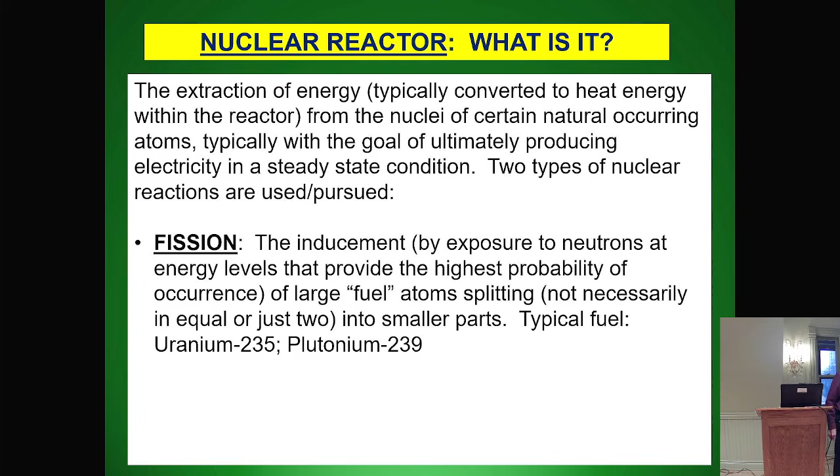This ends up being produced in every practical operating fission reactor in the country. Okay? Just realize that. I know a lot of people might think, oh, plutonium being produced, bombs, all that. It gets produced. In fact, in any fission reactor in the United States that we're going to talk about, roughly by the end of a given fuel cycle, which is typically 18 months, about 30 to 40% of the power being produced is coming from that fuel that is produced inside the reactor itself.

The other type of nuclear reaction that we're not currently able to make electricity with, but we're trying to investigate, is fusion. What is that? Well, that's pushing subatomic, like the nucleus of a type of hydrogen called deuterium and or tritium. And that just has to do with, does it have in the nucleus a proton and a neutron, that would be deuterium, or a proton and two neutrons, that would be tritium, okay? Pushing those together and getting energy out of that.

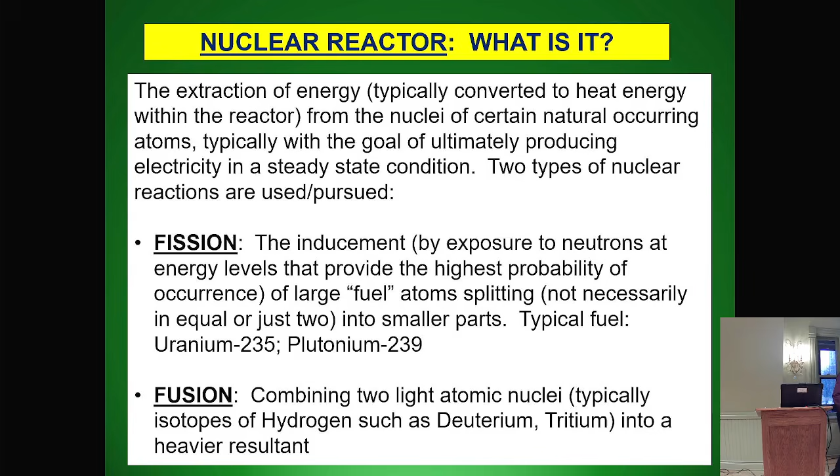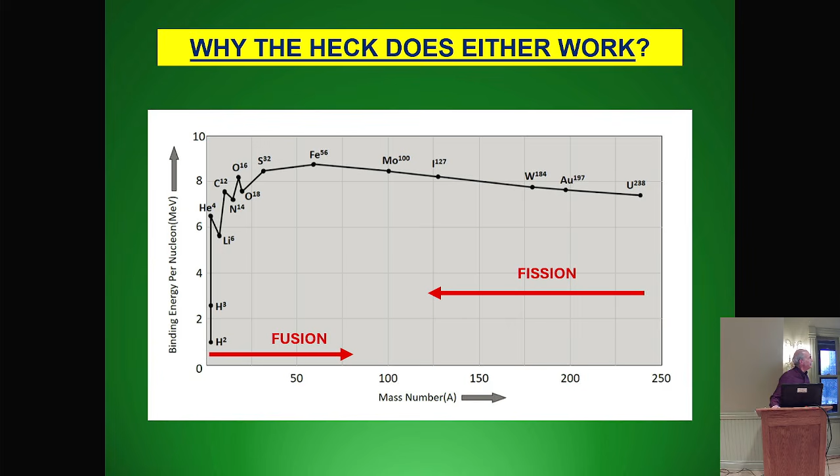And of course, it begs the question, how is it that both splitting nuclei can give me energy and combining nuclei in a sense can give me energy? That's what the next thing is designed to answer. And this is a plot of what is called the binding energy per nucleon curve. So of course your first question is, what the heck's a nucleon, right? A nucleon, as the name might imply, is a particle that resides in the nucleus, either a proton or a neutron, okay?

Binding energy is the amount of energy, think of it this way, we can look at it from two different vantage points. One is, I have a nucleus. How much energy would it take me to pull every one of those neutrons and protons out of the nucleus and separate it into all of its constituent parts? That's binding energy. Or the opposite. When I combine all of those same particles into a nucleus, energy is liberated. And that same amount of energy is what I had to expend to do the first part, where I said I would pull it all apart.

That's called binding energy. What is binding energy per nucleon? It's after we figure out what that total binding energy is that's liberated when I put a nucleus all together, or how much I have to expend to pull it all apart. You just take that total divided by the total number of nucleons, and that's the binding energy per nucleon. It's an average. What do we have here? This is the mass number of naturally occurring stable nuclei and or atoms. This is binding energy per nucleon, what we just talked about.

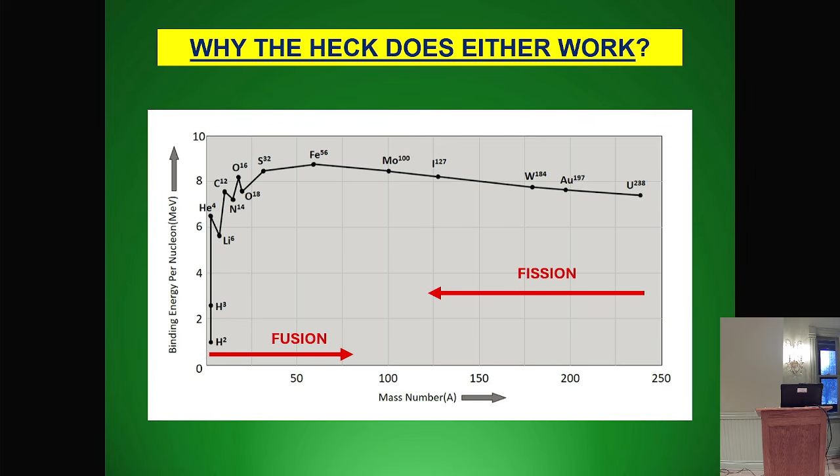What this shows you is that depending on where I start, in fusion, if I start with very light nuclei like deuterium and tritium, and I put them together to get a heavier nucleus, I end up with something that's more tightly bound, a higher binding energy per nucleon, which means that when I put those things together, they liberate energy out.

And similarly, when I start with a heavy nucleus like uranium, way out here, when I break it into smaller components, I get something with, again, a higher binding energy per nucleon. From this end of the curve, I get a higher binding energy per nucleon out. I get energy liberated. When I start with light nuclei and combine them together, I get a similar type of thing. Now, obviously, you can see that I get a much larger change with fusion over here on a per reaction event than I do with fission.

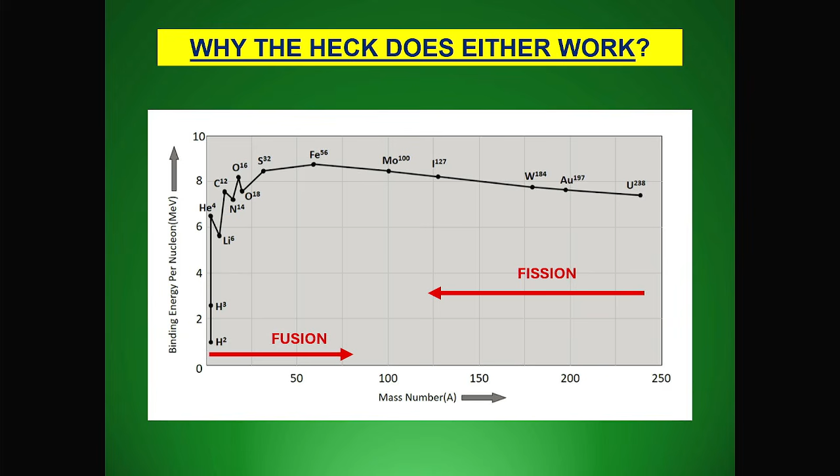So you can get nuclear energy out of a reaction going either direction. It depends on what you're starting with. And of course, you might be wondering, what's the most stable thing according to this, or the highest binding energy per nucleon? Iron. Iron's right there at the peak. Questions on that?

Okay. That's getting too detailed. That's for another day.

Now, of course, the investigation into this was accelerated during World War II in the efforts to develop the atomic bomb, starting with Chicago Pile 1, which was a demonstration reactor in the city of Chicago, not at Argonne National Lab, but the University of Chicago. The purpose of that was to demonstrate the theory behind a chain reaction.

In other words, that a small amount of neutrons that we start with would induce a certain number of fissions. Each one of those fissions would give us more neutrons, somewhere between 2 and 3 neutrons per fission, essentially more than doubling what we started with, and create more and more reactions. That was the purpose of this. And it was comprised of a bunch of graphite blocks with holes drilled in them for fuel, used natural uranium. So it was not enriched.

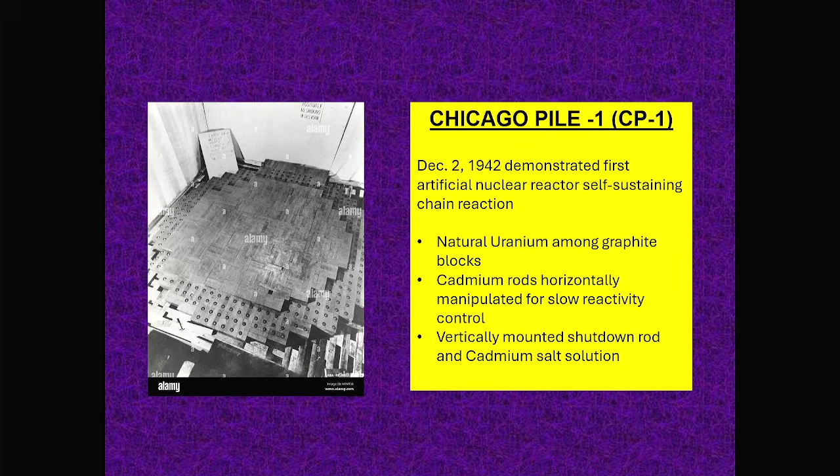And they had some emergency methods. One was a vertically mounted shutdown rod with basically an axeman and a pulley. And someone with a bucket of cadmium salt solution on a platform up above that they could dump onto the reactor. Some pretty, in today's perspective, crude devices.

That was called the Metallurgical Lab there at Chicago, led by Arthur Compton. You may have heard of that name. He was a Nobel laureate. And again, it was to prove that the chain reaction would actually work. Once they did that, they determined that they would need more uranium and plutonium production for developing the bombs, and that resulted in a reactor out in Hanford, Washington, being built for that effort.

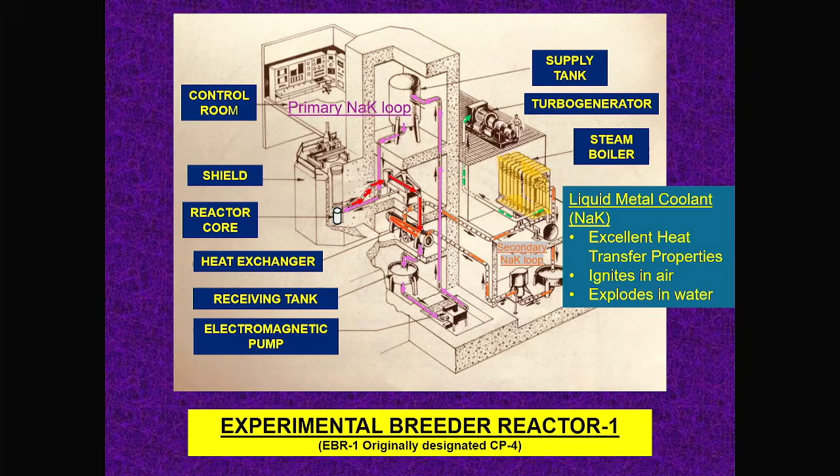And then the green is that steam being routed up to a turbine. The steam pushes the turbine blades around. On the other end of the shaft of the turbine is a generator, and that's where the electricity is produced. Think of it as a magnetic field spinning around, cutting through stationary metal coils, which induces voltage and current that we can then hook up to the wires out on the grid.

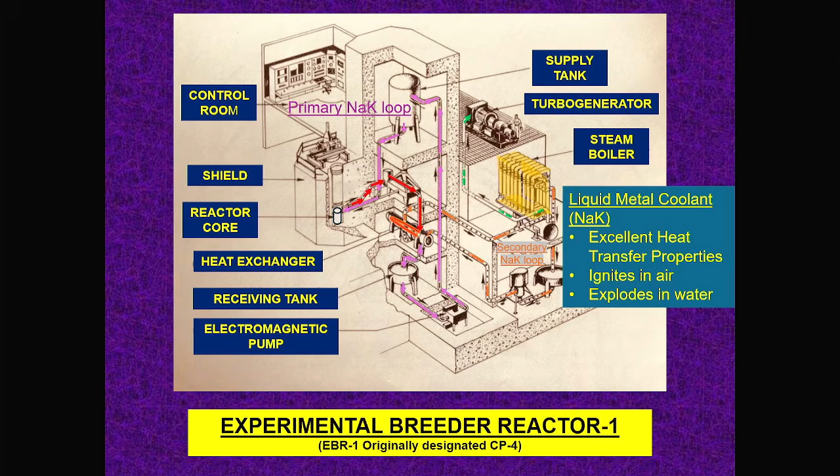This was not meant for use to produce electricity for a town or anything. However, it did light up 4 light bulbs. So it was one of the early reactors used to technically produce electricity, but that was not its primary purpose. It did demonstrate the concept of breeding. What is breeding? Breeding is when you end up producing more fuel than you consume in a reactor. And it was successful at demonstrating that.

It produced more plutonium. Remember, I mentioned that in any uranium reactor in the United States today used by industry, we produce plutonium. It just happens. It's part of the process, as neutrons get absorbed by what's mostly the type of uranium in the fuel, uranium-238. When that absorbs a neutron, it transitions through a couple of decays called beta minus decay to become plutonium-239, which is a useful fuel. So most reactors in the United States, we would call that conversion, converting uranium-238 to plutonium-239.

If we produce more plutonium-239 than we consume of the main fuel, which is uranium-235 — uranium-235 undergoes fission at very low neutron energies — if we're producing more plutonium than uranium that we're consuming, we have a breeder. That's all there is to it. It's very straightforward.

And one of the other things they included here was what's called thorium-232, another isotope of another element. Thorium exists throughout the world in huge amounts. Thorium is not fissionable directly. However, when thorium-232 absorbs a neutron — thorium has 90 protons in the nucleus — it undergoes a beta minus decay that converts a neutron to a proton. Now I have 92 protons and I'm no longer thorium, I'm uranium. I'm uranium-233, because I absorbed 1 neutron in something that had a total of 232 nucleons, making it 233 total.

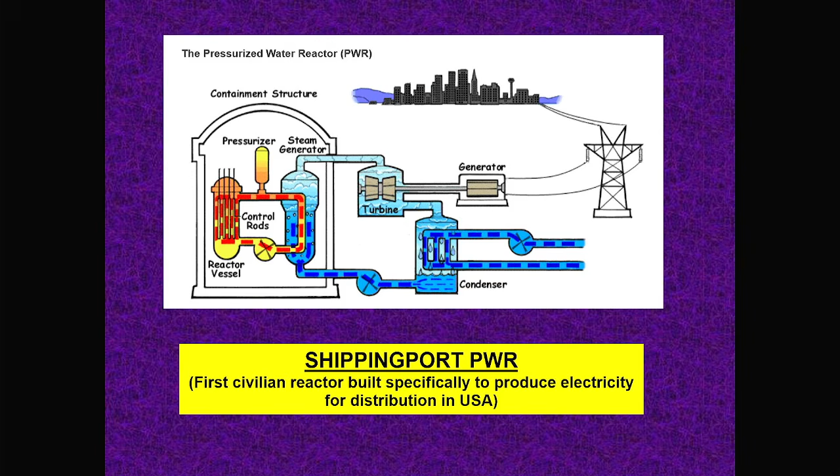Yes, in 1953, President Eisenhower announced the Atoms for Peace initiative, which proposed a reactor solely for civilian purposes. The one in Russia or Soviet Union that I mentioned was not solely for that, it was also used to produce bomb material. This one was solely for production of electricity. This was the first in the world to do that.

Initial criticality on Shippingport was achieved December 2nd, 1957, about a year before I was born. And it went into commercial operation the year I was born, but a few months earlier.

Like I said, it was the first nuclear power plant in the world to be used exclusively for electric power generation. It produced initially around 68 megawatts, so 68,000 of those hair dryers. And then later they did what's called a power upgrade to 100 megawatts electric. It operated until 1982.

Then we have what's called a boiling water reactor. The first one of those was the experimental boiling water reactor built at Argonne National Lab, which I accidentally mentioned earlier, a little bit south of Chicago, where Argonne National Lab is located. First criticality of that was in 1956. What's going on here? Like the name implies, with this reactor, we're actually going to boil the water, the middle word is water, right, in the core.

So why can I do that here but not on the pressurized water reactor? Well, for one thing, the way the geometry, thicknesses, and all of that of the fuel are designed to allow that in a boiling water reactor. In a pressurized water reactor, it is not. So you can design the fuel to accommodate different styles, if you will, of reactor.

What do we have going on? Here's the core. You'll notice a pair of recirculation pumps, they're called, here and here, actually attached to the reactor vessel. Why the heck do we have that when ultimately we want to produce some steam? This is the steam coming out of the reactor vessel going to, now we're seeing a more complex set of turbines.

A high pressure turbine and three low pressure turbines that then exhaust into a condenser. This is circulating water from, say, a lake or the sea that removes the heat, latent heat, from that exhaust of the low pressure turbines, so that it's water again that's subcooled that a pump can then pump into the reactor core again and keep that cycle going.

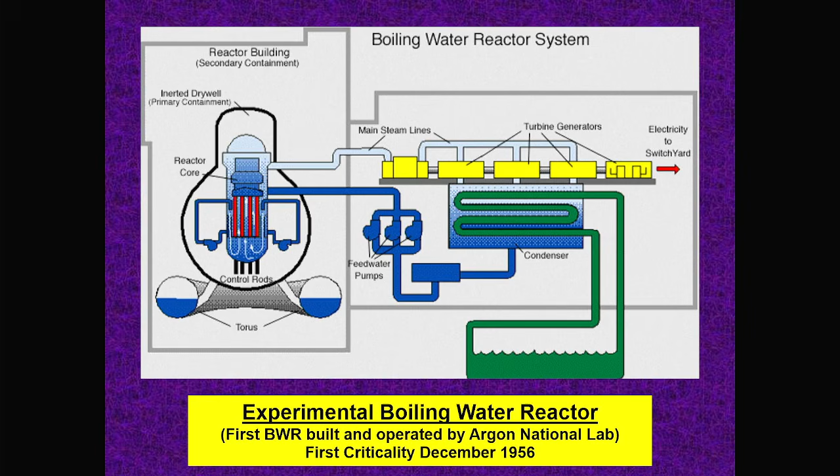Questions on a boiling water reactor? What's going on there? So it's steam that's being produced right in the reactor core itself. Pull out some moisture, send it over to the turbine. Again, push the blades, make the shaft go roundy, and on the far end is a rotor of a generator, an electrical generator. That goes roundy, produces AC electricity out to the world.

This is a high temperature gas cooled reactor. The first one of those was built in Pennsylvania, Peach Bottom Unit 1. It's no longer operating. It's helium gas cooled, graphite moderated. Remember, a moderator is a material used to slow down neutrons to an optimum energy for the type of fuel that we're using.

I have to look into this because I don't have direct experience with high temperature gas cooled reactors — only two were built in the United States, and pretty much after the 70s, none were operating. This one was about 80 miles southwest of Philadelphia. There are still two other units, Peach Bottom Unit 2 and 3, and those are boiling water reactors. This one hasn't operated since it was shut down in 1974.

This used a thorium-uranium mix for fuel, remember I mentioned thorium before? The use of thorium allows you to produce uranium-233, which is another fuel. So this concept, if you've read about the opportunities for things like how do we produce more uranium fuel, that concept's been around a long time, and the possibility of doing that has been demonstrated long ago.

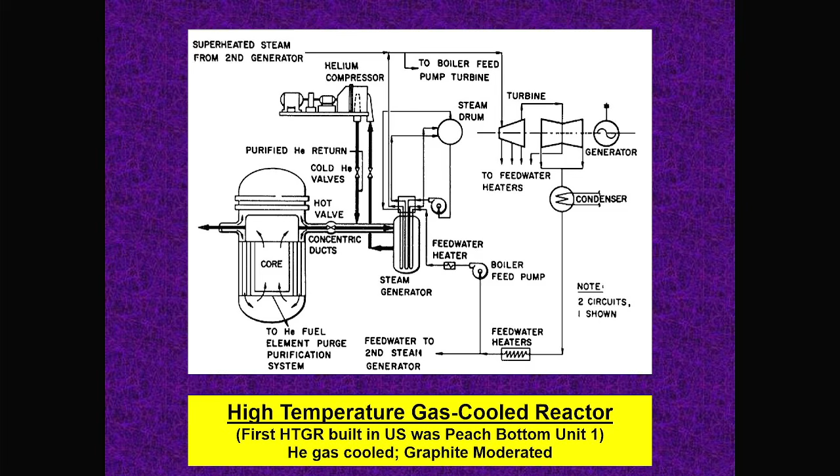What was it, around 35% or better thermal efficiency? What's efficiency? It's how much do I get out for how much do I put in. That's fundamentally what efficiency is. So if I get out about a third of what I had to put in, I've got 33% efficiency.

That's pretty close to what most pressurized water reactors are. Boiling water reactors are a little more efficient because you have one less heat transfer process—the steam is being produced right in the reactor. And these high temperature gas cooled reactors were even better for thermal efficiency. They have other problems.

So how many were built of each and how many are still operating? Pressurized water reactors—we're talking about the utility industry, for making electricity, that's what we're interested in. We've got these data centers that are going to chew up all kinds of electricity, plus more electric cars. So we need more electricity.

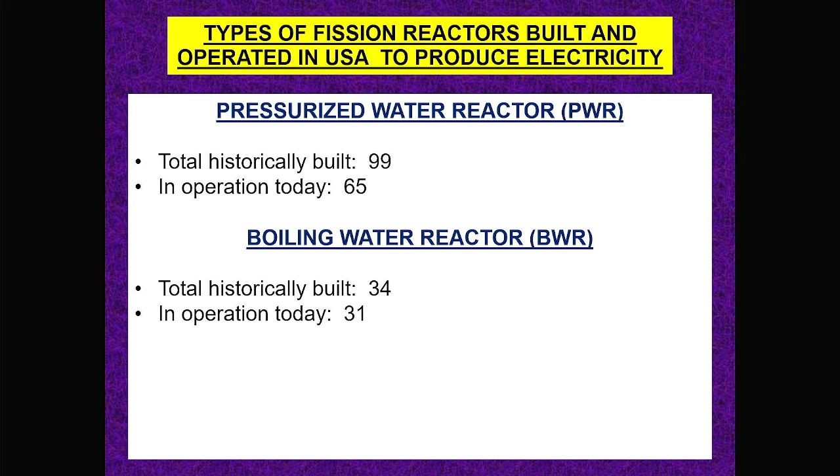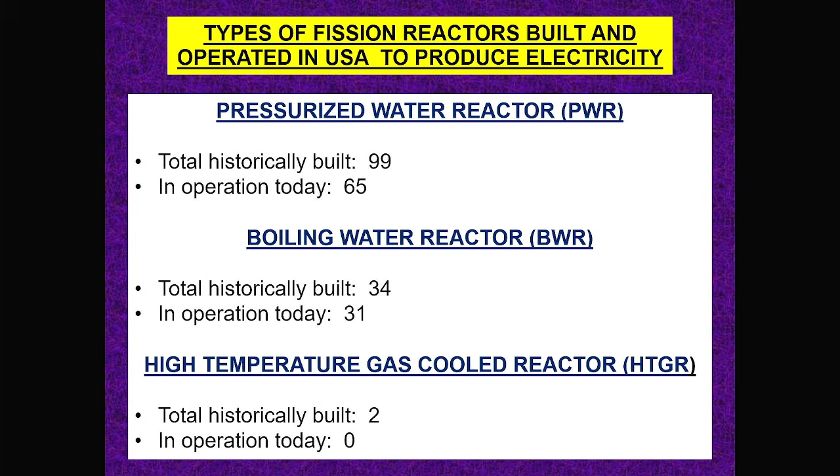Historically, 99 pressurized water reactors were built, 65 are still operating today. Boiling water reactors, historically 34 were built, 31 are still operating. High temperature gas cooled reactors, historically 2, none are operating—the other one was out in Colorado. So that's kind of the history of the types of reactors we've used in the United States, and where we are, how many we built, where we are today.

Now we're going to look a little bit at nuclear industry accident history. This is just the private industry—we're not talking about the DOE and the government. They did even worse, okay? A guy pinned at the top of the containment, the SL1 accident—there's some crazy stuff, all right.

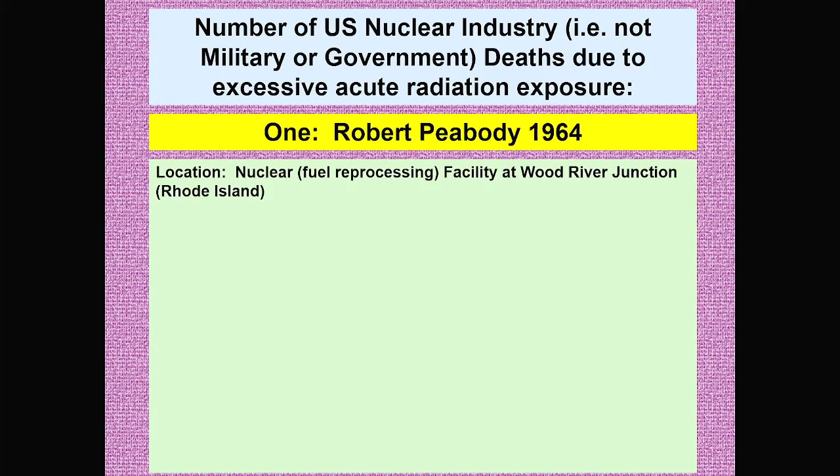The number of U.S. nuclear industry—not military or government—deaths due to excessive acute radiation exposure, meaning someone got exposed to so much radiation it killed them: one. His name was Robert Peabody. It happened in 1964, not at a nuclear power plant that produces electricity—it was at a fuel reprocessing plant, located at Wood River Junction, Rhode Island.

At this reprocessing plant, part of the job was to clean out some bottles using a solvent. Think of it: how do I take a solid rod with radioactive stuff in it—uranium and plutonium I want back—probably going to have to melt it or react it with some acid, turning it into a fluid so I can chemically separate all this stuff. Then I've got these bottles I have to clean out for the solvent.

One part of the process was to take an 11-liter bottle—what's 11 liters? That's pretty good size, okay—and shake it for 20 minutes, each bottle, and then dump out the solvent.

Now they had some bottles there, from an issue they'd had—I don't want to call it an accident—with fluid that was more enriched with uranium than the average bottle that needed to be cleaned. From what I read on the NRC's website, he grabbed one of those.

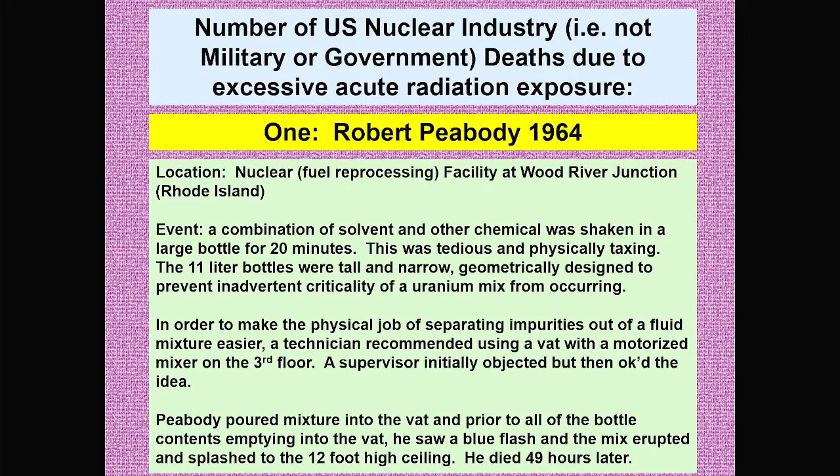So it's amazing sometimes to look back on some of the things that were done years ago without proper review of what they were proposing. And it's accidents like this, right, that led in the industry to the emphasis on adherence to procedures, the emphasis on safety, as people could die.

How many U.S. nuclear industry accidents have occurred? 56. How do we define what an accident is? Okay. So that is defined based on the loss of at least $50,000 in property damage or loss of life. That's how we define what a nuclear accident in the industry is.

The two most significant ones in the U.S. nuclear industry, in other words, privately owned: Fermi 1 near Detroit was a fast breeder reactor; because of flow channel blockage that resulted in a partial fuel melt. 2 of the 105 fuel assemblies were melted, and that was on October 6th in 1966. Right at the end of construction of that reactor plant, they decided to add these kind of plate geometries, as I understand it, just in case we had a core melt, to catch it, and then they caused the core melt because they came loose.

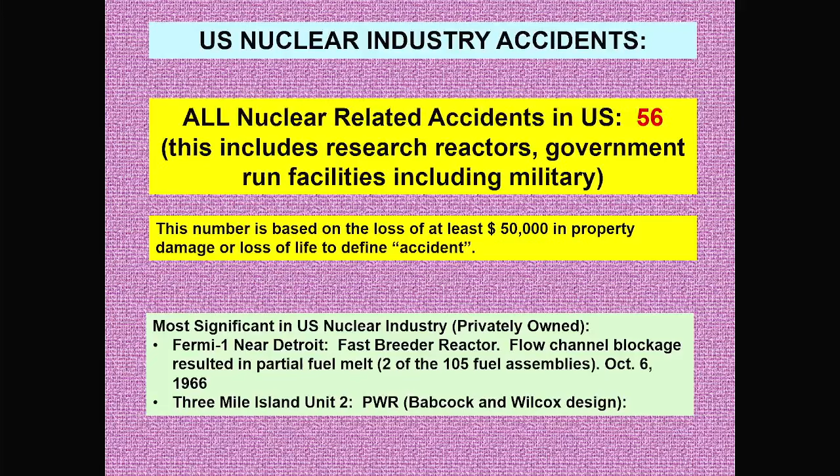And then 3 Mile Island Unit 2, which was a Babcock. And so we mentioned pressurized water reactors, right? The word vendor you might run across when reading about the nuclear industry. What's that? That's the company that designed and got the design approved, basically, for a reactor type. Who is the big vendor of the boiling water reactors? General Electric. Somebody here earlier mentioned somebody that they knew that worked for GE Nuclear.

There were 3 vendors of pressurized water reactors. Westinghouse, and the plants that I have worked at were all Westinghouse. Combustion Engineering, and Babcock and Wilcox. 3 Mile Island was a Babcock and Wilcox design. One significant difference about their design was their steam generators: instead of having what we would call an inverted U-tube for the tubes inside the steam generator, they had a straight through tube that went from the top of the steam generator to the bottom.

Why would they do that? Because then they get superheated steam out the top, which is better quality steam in terms of thermal efficiency, but when you lose feed flow to your steam generators, that secondary fluid, which is removing the heat from the primary, boils off really quick. And that was part of what happened at 3 Mile Island. I've taught 3 Mile Island and Chernobyl many times; that's too much for us to cover tonight. Questions on the big picture on any of those accidents? I'm sure everybody here is somewhat familiar with both of those, or at least 3 Mile Island.

All right. So more natural types of things, advanced cooling systems that use more materials that have been developed that are, material science has come a long way. We can build materials one atom at a time. Now, didn't have that back then in the 70s. So materials that improve heat transfer and help prevent overheating and enhance fuel designs. They are now designing fuels that simply won't melt. Okay? So it's pretty interesting to go and research that, look at that online.

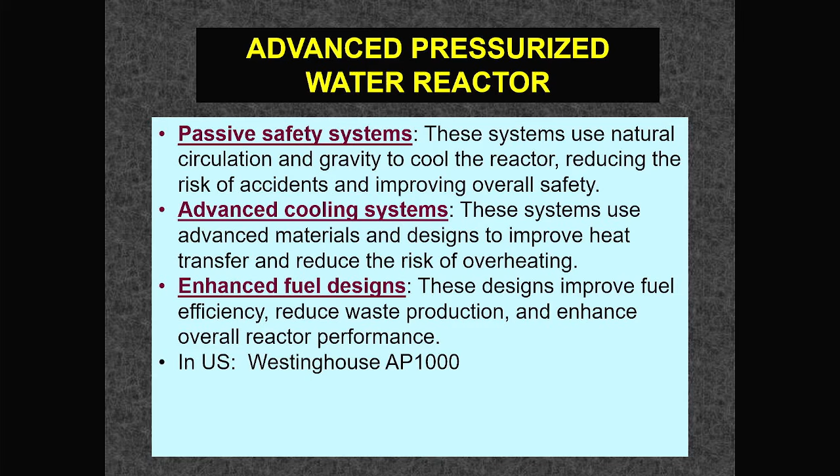In the United States, there's one of these plants been built. It's a Westinghouse AP 1000. I'm sorry, two. They are down at Vogtle site in Georgia. That's it. Okay. In last year, Westinghouse announced plans for 10 more. They're called AP 1000 because they produce 1,000 megawatts of electricity. Okay. So 1 million hair dryers.

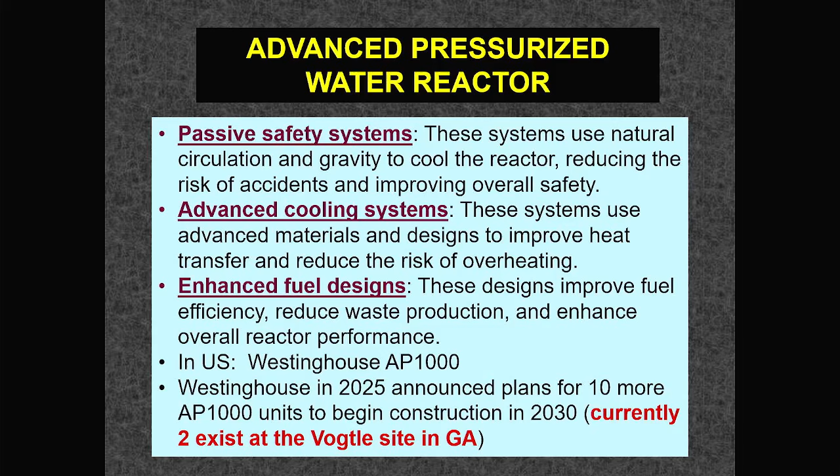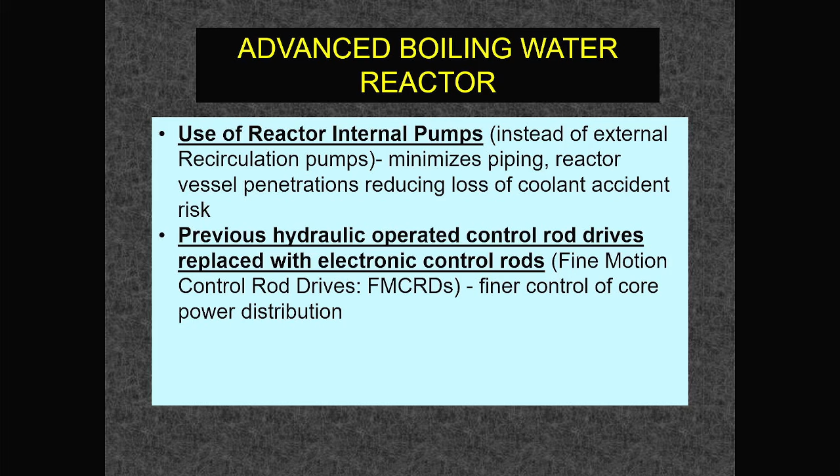Previously, all the boiling water reactors in the United States use what's called a hydraulic drive to drive the control rods up from the bottom. And it's a pretty complex thing. Now they're replacing those with electronic control rods. Much finer control. The hydraulic ones had to move like a notch at a time, like this. Now they'll be able to move nice and smooth. Okay, so you can move it very fine. Better core power distribution control.

And the typical standard in the whole industry, you have certain what we call safety functions that have to be performed to protect the core. Well, you don't want just one pump that can do that. You want at least two, right? Figuring if one fails, this guy can do the job. If Fred fails, Eric can do the job. Well, now they've said we want Sam too. So now we're going to have three trains of everything, right? That can do the safety function of anything that needs to be done. So that's a new design requirement.

There are four of these in Japan, and obviously demonstrated they needed the better ones after Fukushima. We don't have any operating in the United States.

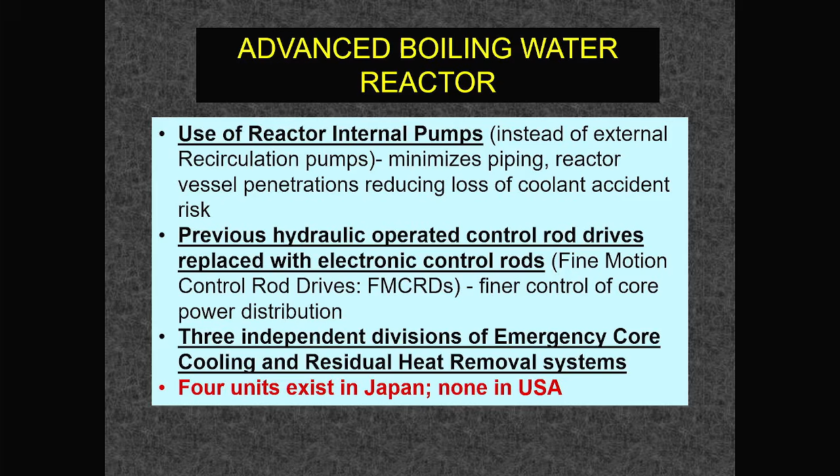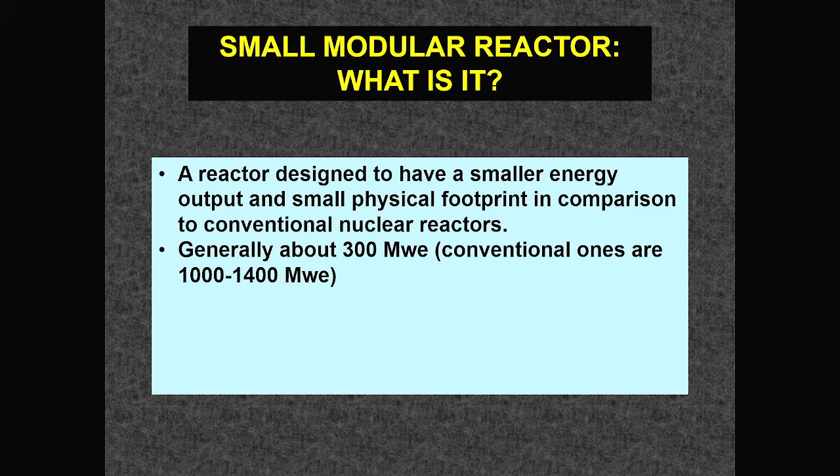What the heck is a small modular reactor? All right, anybody got a modular house that they built? Prefab. That's basically the idea. It's the same idea. It's designed to have a smaller energy output, small physical footprint in comparison to the big ones, like the ones I worked at put out 1,300 megawatts of electricity. These put out about 300 megawatts of electricity. Okay. And in the world, there are three operating, one in Russia, one in China, one in Japan.

As far as thermal efficiency, I'm not sure. I would expect somewhere in the 30s. You know, actually, I would expect better because I think they're mostly looking at using liquid metal, which again is a good heat transfer medium to use. So it should be maybe more up like 34, 35% thermal efficiency.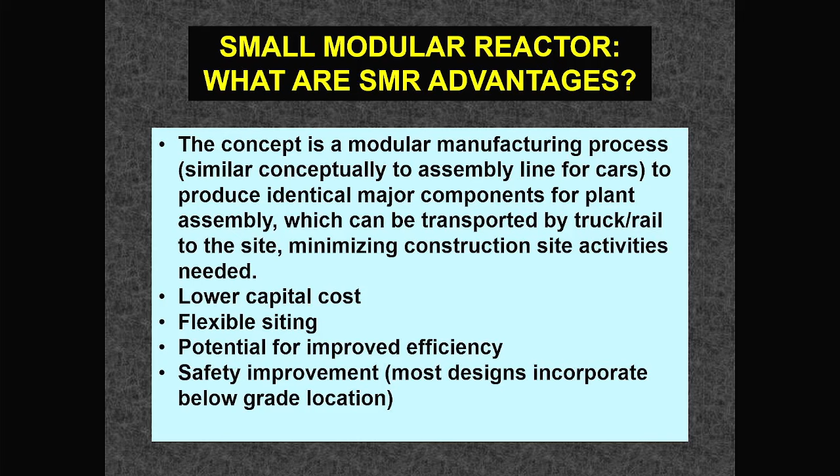The concept again is modular manufacturing. Someone mentioned, I think it was Jack, or maybe somebody else, but think of it like an assembly line for cars, right? You produce these modules that then you truck out to a site and you connect it all together. There's your house, there's your reactor plant. Okay, can be transported by truck or rail. Should cut down the capital cost, flexible siting, and like you mentioned, potential for improved thermal efficiency and ultimately efficiency of the plant and safety improvement. Okay, and jobs. It's always good to have jobs.

What designs are approved? One, NuScale is the company that actually has two designs approved by the NRC, the Nuclear Regulatory Commission. Two different designs, US 600, US 460. One was approved in 2020, one in 2025. What's that mean? That means they can now be referenced in an application to build. They're not building.

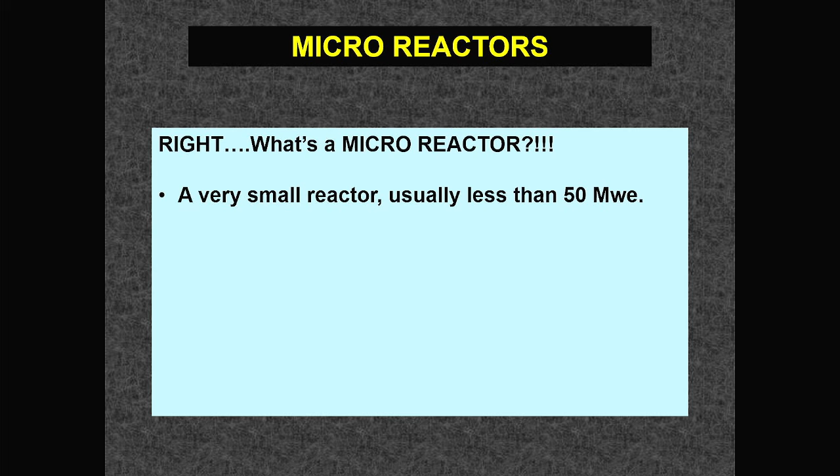What's a microreactor? Teeny tiny. A very small reactor, usually less than 50 megawatts. It'd be bigger than this. Why consider them? They can theoretically be produced more quickly, within weeks, transported, deployed.

I'm in a book club with my former Navy Nuke Power School classmates. We do it online, virtual. And last night was our most recent meeting. One of the guys mentioned that the Army, I know I said I wouldn't talk about the government, but he said the Army now has one that they've developed.

I don't think they technically would be called that. I think that might be what's called a nuclear battery, and that's a different animal. Yeah, there are things that are called nuclear widget, right? And like the nuclear rockets they were developing back in the early 60s were not really nuclear powered. They used a nuclear energy source, like a match to light the blast, which was really a chemical again.

Of course, when you think about something that small, then, okay, you need a higher enrichment. Right now, the reactors we operate use about what's called 5% enriched uranium-235. The rest is uranium-238. These need like 20%. What's the problem with a higher percent enrichment? You get closer to bomb material, which means terrorists and those people want it more.

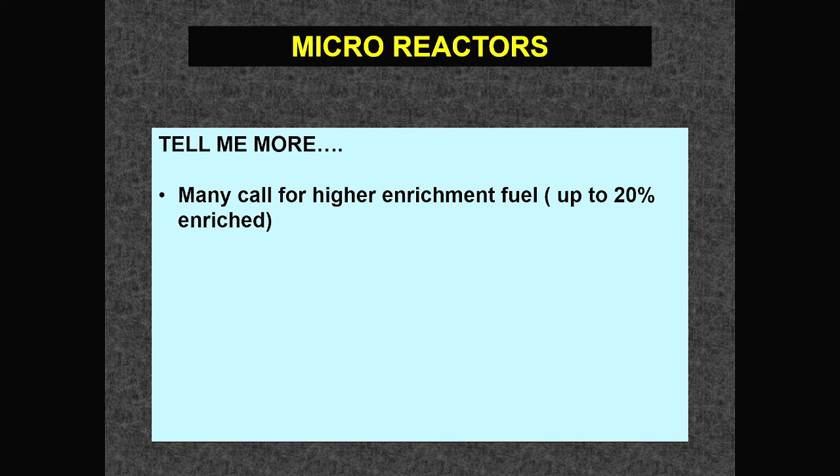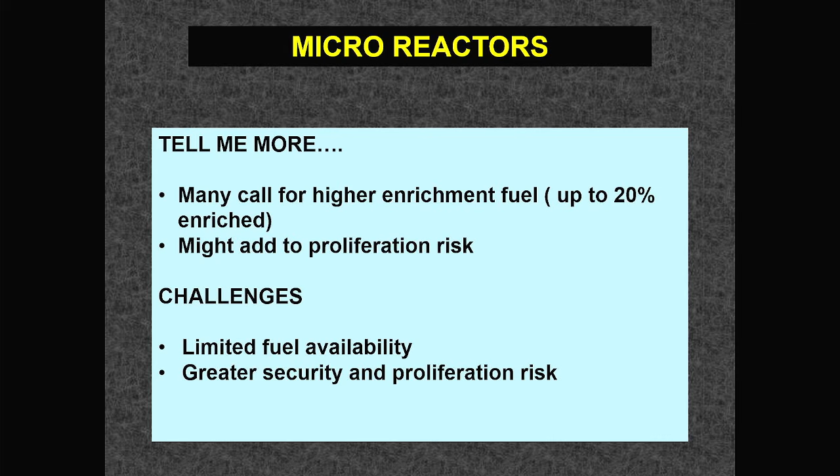And I make this reactor small, it'll fit on the flatbed of a truck. Do you see a natural problem here or risk? So I'm a little iffy about this. Might add to the proliferation risk. Right now, there's not the higher enriched uranium out there on the market. Good. Okay. So they got to think about this a while. So you may have heard about microreactors, but I don't know if that's really going to happen.

Fusion. I'll just quickly touch on this, and later you can go through. I don't know if they can get to the PowerPoint, or if you can just add the rest of it onto the thing later.

But at least two light nuclei must be brought so close to each other that the strong but short distance nuclear attractive force, somebody over here mentioned nuclear weak and strong forces, that's what you're getting into here with fusion, overcomes the electrostatic repulsion. Like charges repel. What's in the nucleus? Protons. They're repelling each other. So how the heck can 92 protons be so close together in uranium? Because of the strong nuclear force. But you got to overcome that repulsion to get them close enough that they then glom onto each other.

Requires the achievement of extremely high temperatures and pressures to cause the fusion process. Very close proximity, i.e. density, of the ions being fused. So what's an ion? Take an atom, like hydrogen has one proton, and if we're using deuterium, a proton and one neutron. Neutron has no charge, and one electron. Remove the electron. Now you have an ion, i.e. it's just the nucleus with a charge, basically.

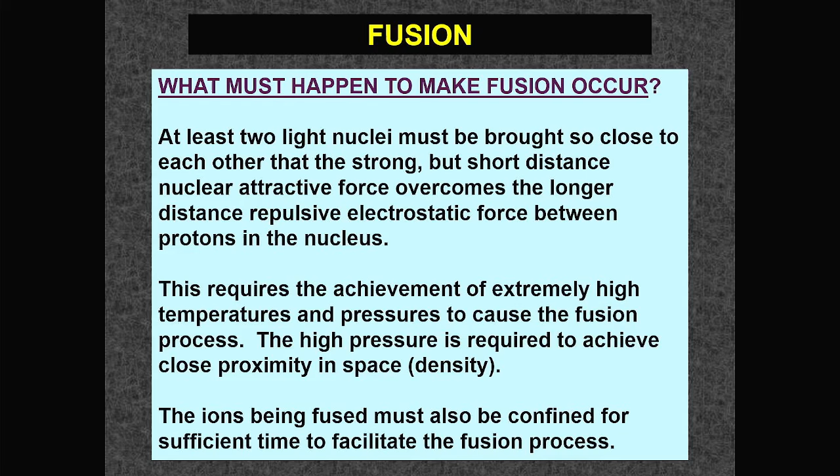And if you have stripped all of the electrons off of a helium or something like that, and all you have are charged nuclei and a bunch of them, that's called a plasma. And that's often considered the fourth state of matter. There's two types of methods being pursued, even to this day, even when I was at Michigan in the late 70s: inertial confinement and magnetic confinement.

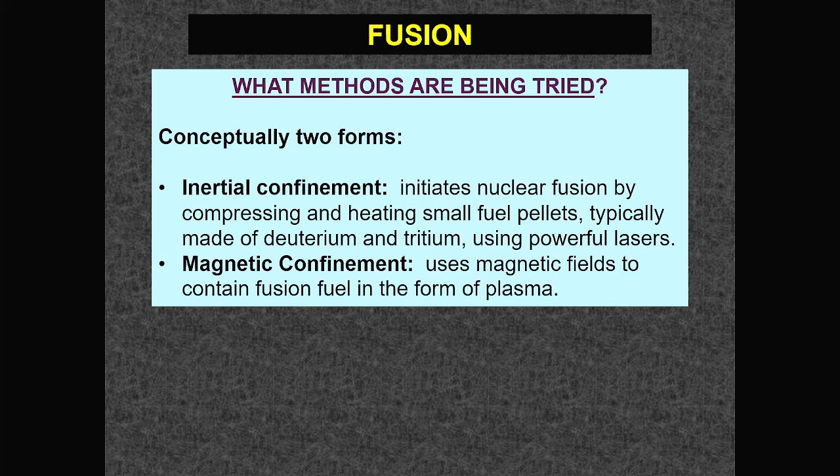Inertial confinement, think of it as you got a little bead. And this time I am talking about a little bead like this size, of deuterium contained in a little sphere, and you blast the daylights out of it with lasers, something like that, and you get the little bead material to burn off the outside, which causes a compressive wave inward that then compresses the deuterium and tritium, and hopefully you hit it hard enough that it causes fusion.

And the magnetic confinement, like the name says, you're using magnetic fields to contain the plasma, which is charged material. Fields interact with or make charged particles move or can contain them. So it's a magnetic bottle. And then you can collapse that magnetic bottle onto the plasma, and again, try to compress it and make it happen.

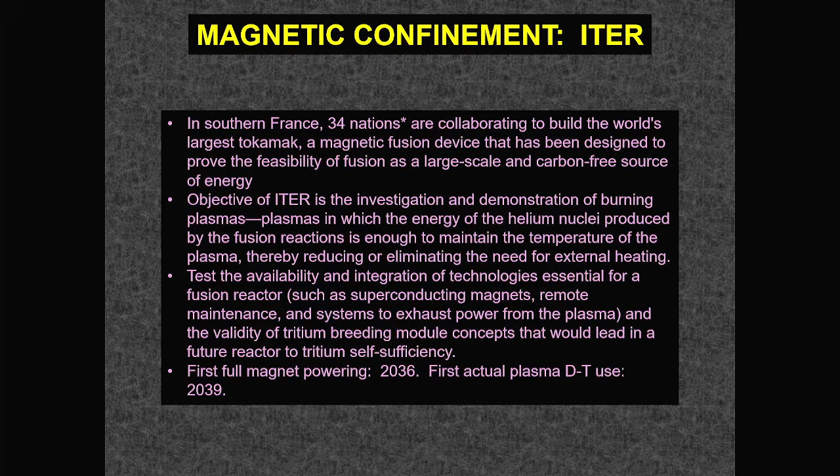There are several other devices. One is called ITER. That is an international project being worked on. First full magnet powering is expected to be in 2036. First use of deuterium-tritium is projected to be 2039. And they're guessing around 2050 maybe they'll produce electricity. I will be 92. It's about as far away as they projected back when I was in college, in other words.

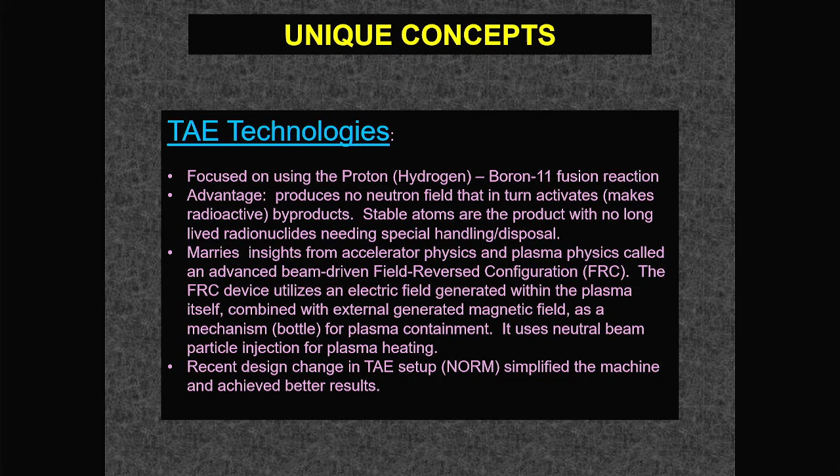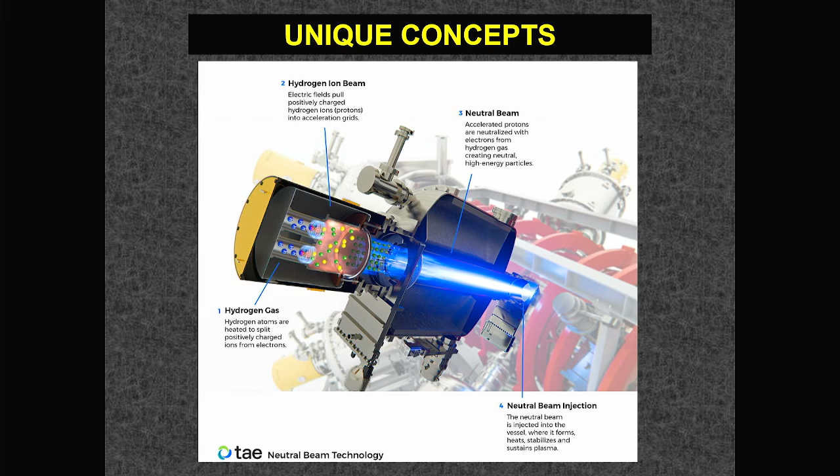There's another company called TAE Technologies, which has achieved some improved performance on their attempt at fusion. That will be interesting to follow. So if you want to look up one that actually has had a recent breakthrough, look up TAE Technologies. I'm not going to go into too much now. It uses what's called a neutral beam technology to help enhance the heating of the plasma before they try and make it fuse. Okay, so you can look that up online.

What questions do you have? Sure, Bob. Yeah. What we're going to do with it. Okay. Yeah, and I mentioned Yucca Mountain. Spent nuclear fuel. Not "nucular," nuclear. Hate it when people say "nucular."

So Yucca Mountain exists. It's a government facility. Every nuclear plant in the country pays about $1 million a year to the government because the government has agreed they are responsible for the long-term storage of the fuel, and they haven't yet come up with where they're going to put it. So right now, most nuclear fuel that has been used is in what are called dry casks. These are fabricated on site at all the nuclear plants. They're concrete with proper venting and cooling, air cooled.

Remember how we talked about the advanced pressurized water reactors and boiling water reactors using natural circulation, even of air, for the cooling? That's what they do. It's not that the fuel itself is open to the air, but there are liners between the fuel that conduct the heat well. For now, that's what's going on: a bunch of spent fuel in dry cask storage out on concrete pads. Eventually, they should be shipped to somewhere like Yucca Mountain.